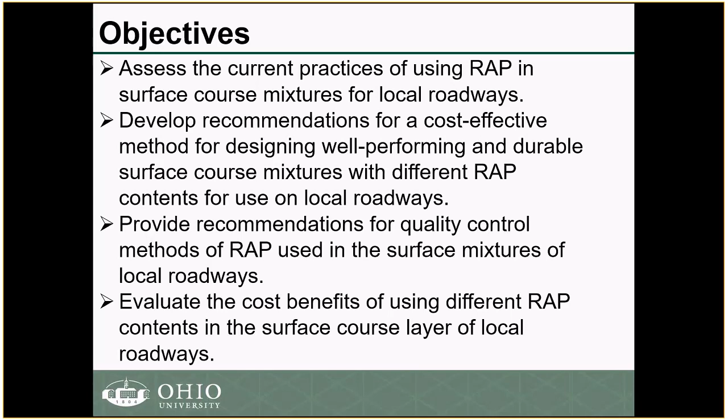And the last objective was to evaluate the cost benefits of increasing the percentage of RAP in new asphalt mixtures used on local public agencies, or LPA. So the study was divided into two phases. I'm showing here basically the tasks that we conducted in phase 1 and in phase 2.

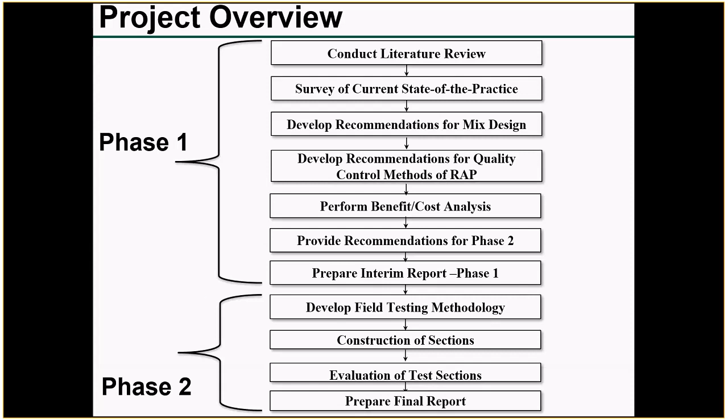So just focusing a little bit on phase 1. Again, phase 1 and phase 2 each were about 1 year long.

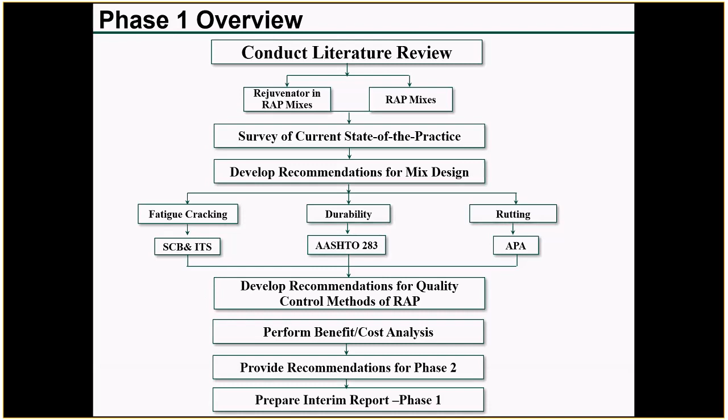The first task was conducting a literature review and a survey of local public agencies in Ohio to identify the current state of practice for using RAP in surface course mixtures on local roads. We also had a task to develop a mix design for mixtures with different RAP percentages, and develop a recommendation for QC/QA for those RAP mixes. This included performing cost analysis to determine the benefits and make recommendations for phase 2, and finally providing an interim report for phase 1.

So the survey was conducted in January of 2018, and it had a lot of interesting results, but I think the most interesting was this. Because of time, I will just limit it to one slide.

This slide is showing the percentage of RAP being used on local roads, according to the survey response, which was conducted about 2 years ago.

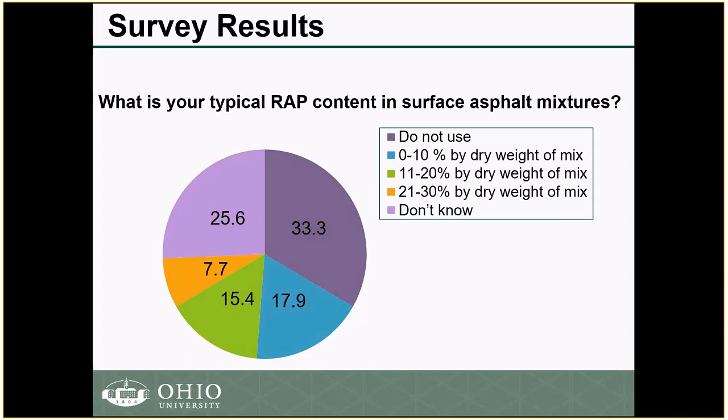The first thing we see is that about 1/3 of local public agencies currently do not, or at that time at least, did not use any RAP in their mix. Then about 25% didn't really know how much RAP was being used. What we've also seen is that the maximum was about 25%; some was a little higher, but mostly it was 25%. But again, less than 7-8% are actually using that amount in the surface course on their local roads.

So therefore, the next step was to conduct a comprehensive laboratory testing program, and based on that, we wanted to develop a new mix design approach.

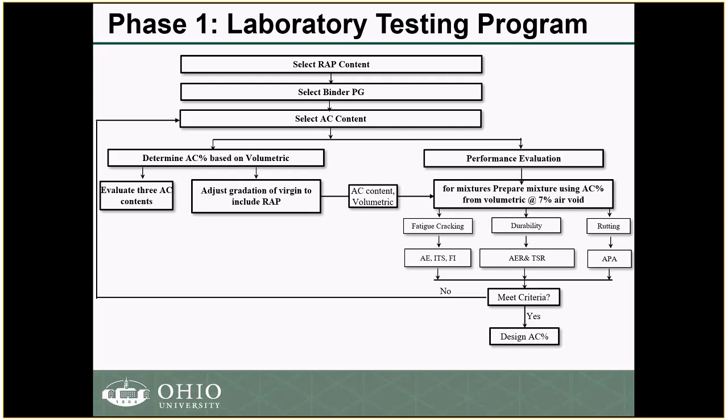The laboratory testing program was to design asphalt mixtures with different RAP percentages, which I'll present in a moment, the same way it's typically used by local public agencies, using the Marshall design method to determine the asphalt content. We then did a comprehensive evaluation of performance for durability, cracking, as well as rutting.

We looked into different mix designs and selected one that we've seen is typically used for a surface course on different local roads. What we also did was use 2 different RAP materials.

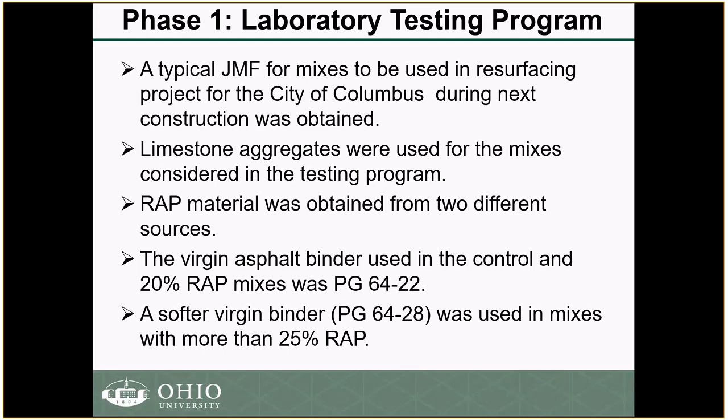We used a virgin asphalt binder in the control mix, as well as 20% RAP, which is PG64-22. The virgin asphalt binder used for mixes with more than 25% RAP was a softer binder, PG64-28, and this was based on testing of the binder.

We obtained RAP from different contractors and selected 2 RAP materials. What we tried to do is select RAP materials whose binders have different rheological properties. You can see a summary of those properties there, basically the continuous high temperature grade and the continuous low temperature grade, and there is a significant difference.

Most of our work was with the first one, which was obtained from Shelly Company in 2017 - Shelly 2017 Pile A. That's the designation for their RAP pile.

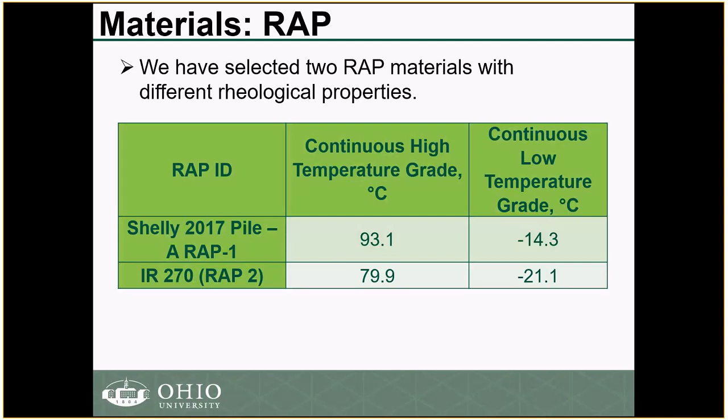Based on the literature, we found that a lot of researchers suggested that when you're going beyond 30% RAP, you might need to use a recycling agent.

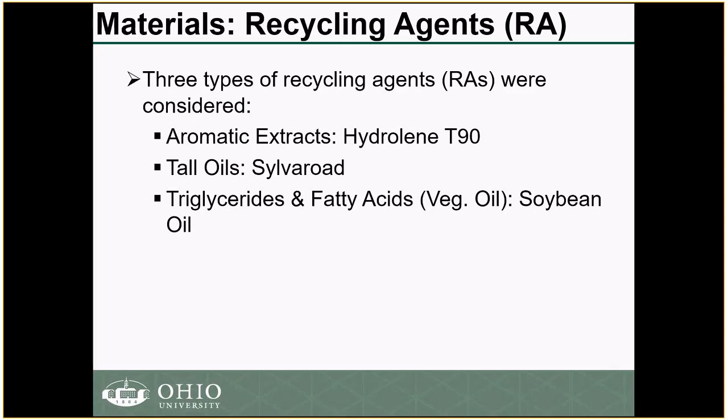Based on that literature review, we identified 3 different types: aromatic extracts, an example being Hydrolene T90, though other aromatic extracts are available; tall oil, where we used Sylvaroad; and triglyceride and fatty acid, where we used vegetable oil, specifically generic soybean oil that's available in the market.

So for the recycling agent, to determine the optimum dosage, we did binder testing.

We blended the RAP with the virgin asphalt binder in the same proportions as in the mixture, using different dosages of the recycling agent. Based on that, we determined the optimum dosage that results in a continuous performance grade for the RAP-virgin asphalt binder blend that meets the target virgin asphalt binder continuous grade, which in this case was 67.7 minus 22.2.

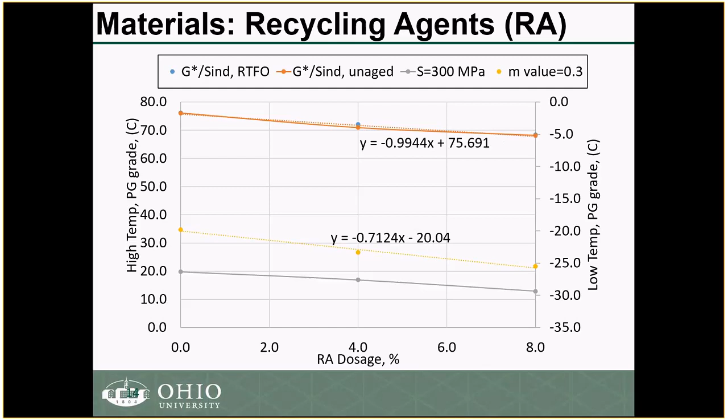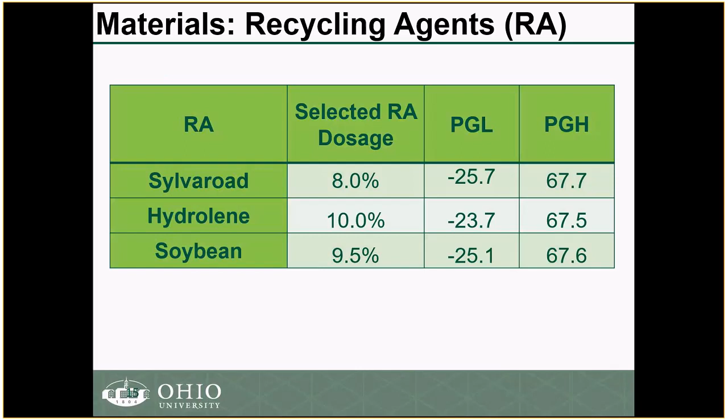This graph shows some of the results we obtained. We had the binder blend tested at different dosages of the recycling agent, and based on that we determined the optimum dosage. This shows the results for the different recycling agents, and you can see that the optimum dosage really varied depending on the type of recycling agent being used.

We tested 17 mixtures. I'm showing in this table all the mixtures we have. We started with the control, a purely virgin asphalt mix, and then we went to 20, 30, 40, and 50% RAP. For the 30, 40, and 50% RAP, just to remind you, we used a softer binder. For the control and the 20%, we used the 64 minus 22.

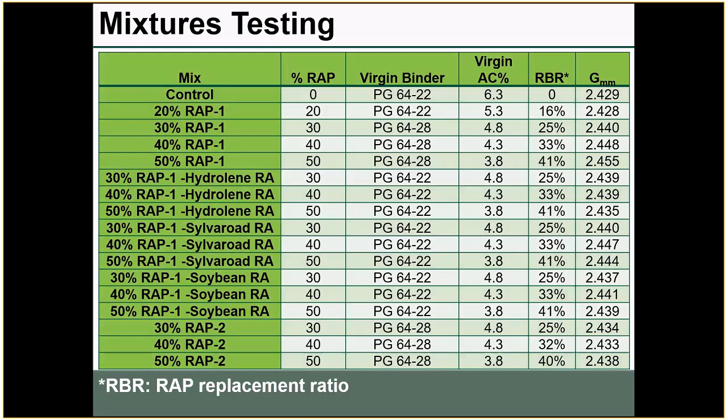For the 30, 40, 50%, we used the different types of rejuvenators or recycling agents. We also tested RAP2, the same mixtures but with RAP2, and that's what you see here.

We did different testing on the designed mixtures: for low temperature cracking, the ACCD or asphalt concrete cracking device; for fatigue cracking, SCB using the Illinois method, commonly referred to as IFIT; then the indirect tensile strength, and the modified AASHTO 283 for durability.

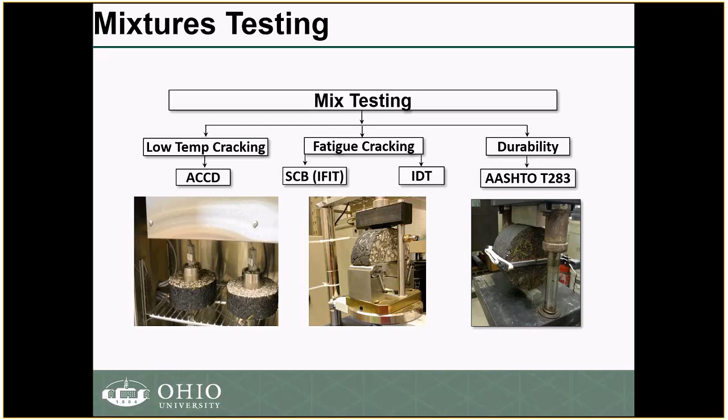Starting with the phase 1 results. For the SCB parameters, we looked into two parameters. The first, commonly used, is the flexibility index. This depends on the area under the load displacement curve, as well as the slope of the post-peak curve, shown here.

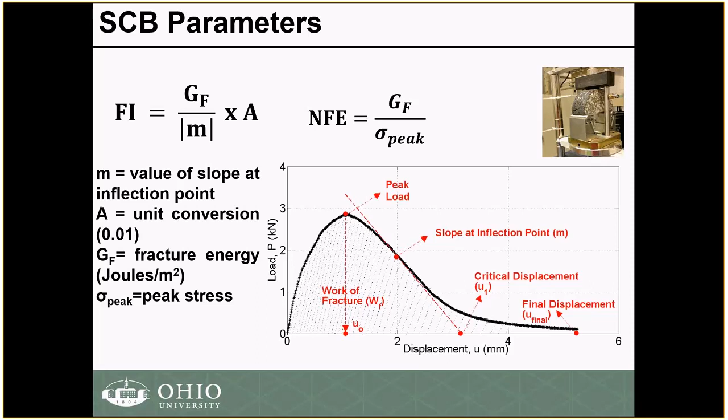Another parameter we recommended, based on a study conducted back in 2017 for IDOT, was the normalized fracture energy. It's basically the fracture energy divided by the peak stress, or the strength obtained in the SCB test. So I'm showing here the flexibility index.

A very important thing to note is that these numbers are for long-term aging, and the aging we did was through putting the prepared mixtures for 5 days at 85 degrees Celsius. What we can see is that as you increase the RAP percentage, the flexibility index is lower, indicating it is more prone to fatigue cracking.

We can also see that although we used a softer binder in the 30%, 40%, 50% RAP mixtures, this did not really help in improving the fatigue cracking resistance of those mixtures.

What I'm showing here is the results for the 30, 40, 50% mixtures with the recycling agents - the 3 recycling agents. We can see that the recycling agents were able to improve the fatigue cracking resistance of these mixtures, in general resulting in fatigue cracking similar to that of the 20% and the control.

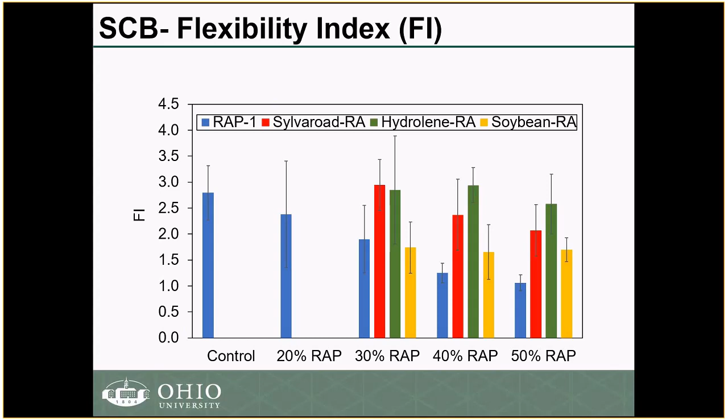Very important, before I go to the next slide: the variability of the flexibility index was relatively high, between 20 and 25%, which we also noted in the previous study. That's why we used the normalized fracture energy, for which the coefficient of variation was less than 15%. It shows a very similar trend to the flexibility index, which we also noticed in our previous study.

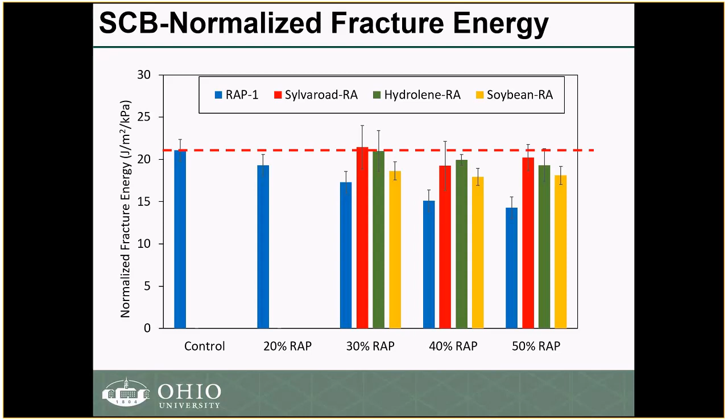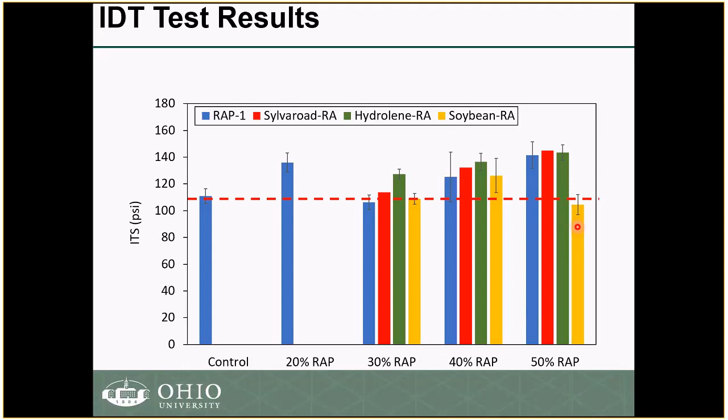One of the things we have noticed is that, in general, the different recycling agents did not really decrease the ITS, except as you can see here, there was a little bit of a decrease with the soybean-based agent, and this is indicating a softening effect of that recycling agent.

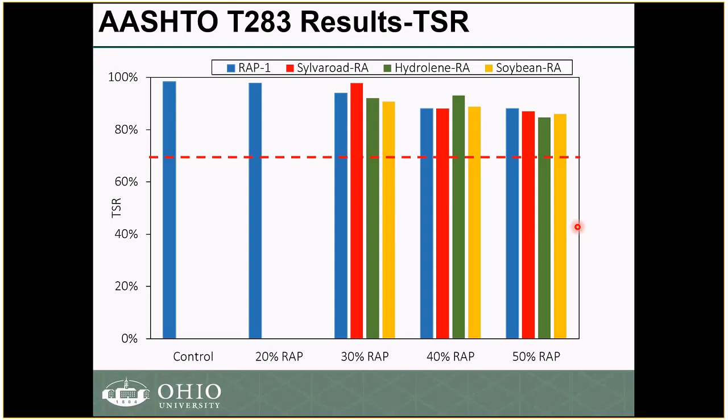In terms of durability or moisture damage resistance, as measured by the TSR, the tensile strength ratio, typically it's required to be between 70 and 80 depending on the mix type. As you can see, it met both the 70 and 80 criteria - all of those were above 80%. In general, using RAP will not result in any moisture damage if your mixture is well designed, meaning you have a good amount of asphalt binder. The TSR for all mixtures were beyond 80, so it met the criteria.

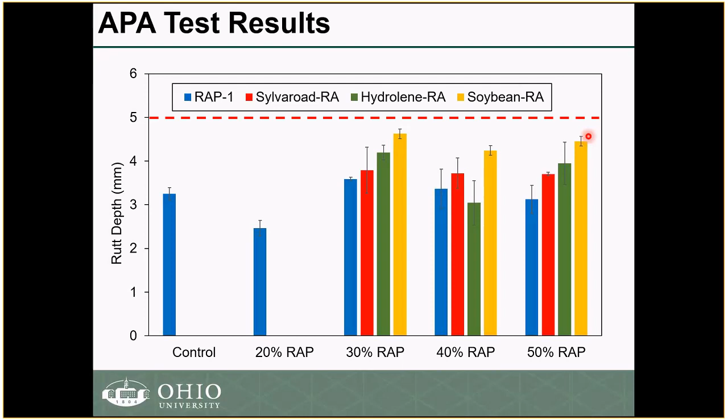We also did the asphalt pavement analyzer to evaluate rutting, because we have seen that there might be some softening. Again, all mixtures have met the criteria, which is 5 millimeters for mixtures with medium traffic. The only thing I'd like to note is that using a softer binder increased the rutting, but it's not that significant - in all mixtures it was not really high. The recycling agent, to a certain degree, some of them resulted in higher rutting, specifically the soybean-based one you see here, which again indicates the softening effect of that recycling agent. But in general, all of those mixtures in terms of rutting met the criteria of less than 5 millimeters.

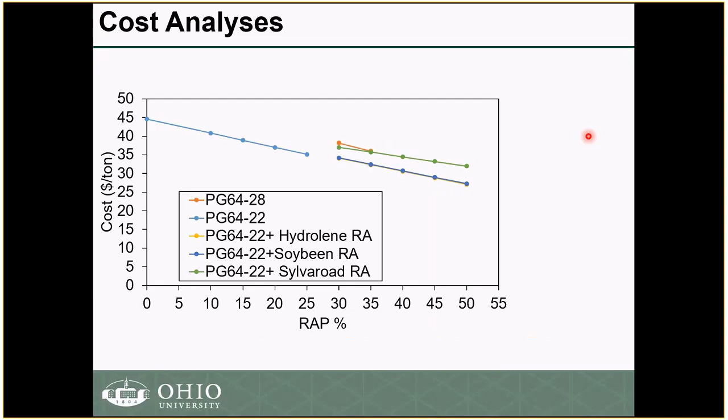So we did a cost analysis, and in phase one, the cost analysis was based on prices back in 2018. It's very important to note that the binder cost and even the rejuvenator or recycling agent cost have changed since then. So these results are based on the cost and prices at that time, beginning of 2018. What we have, as you can see, is that increasing the RAP binder or RAP content results in a decrease in the cost, and basically an increase in the cost savings.

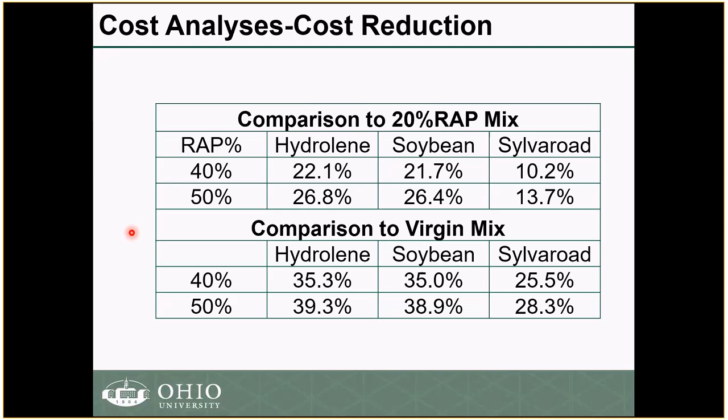If we're comparing it to the virgin mix, and this is important because, as I said at the beginning, some local public agencies are not using any RAP. It's about 1/3 that are not using any RAP in their mixes. So therefore, that comparison, at the second part of this table, is very important for those agencies. You can really go up to close to 40% when you're using a 50% RAP.

So the effect of the RAP source, and that was very important, is that whatever results you're getting for one RAP, you cannot really extrapolate it to another RAP. That is very important for this study and for the local public agencies who would like to implement the studies, that you need to look at the RAP.

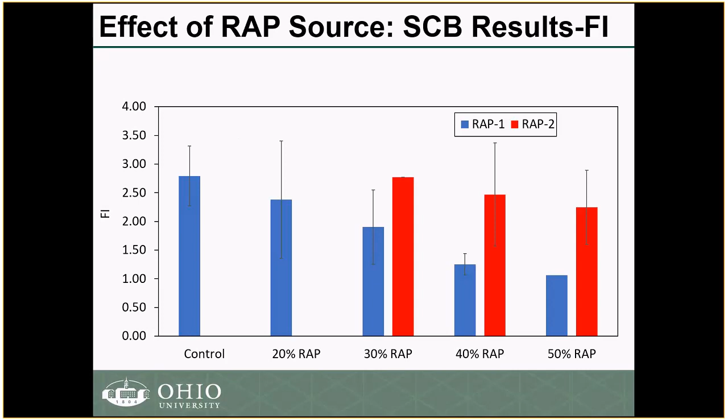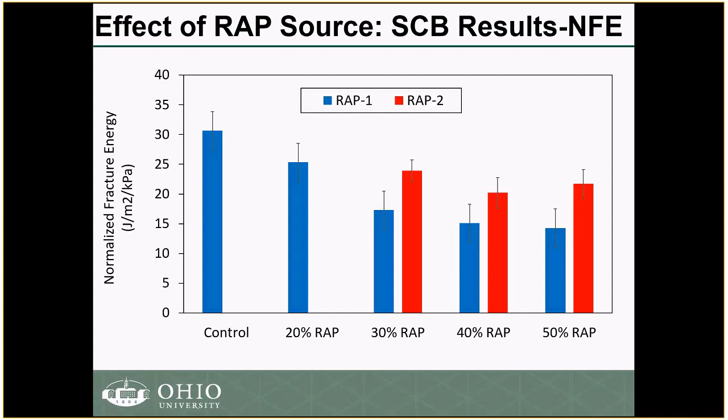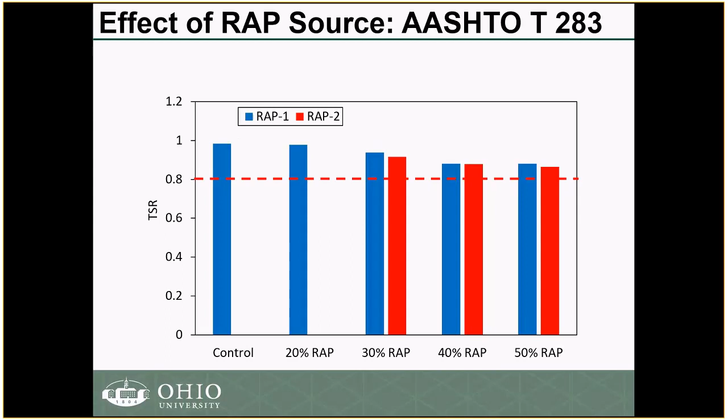For the thermal cracking, there was a difference, and you can see it here, but it was not as significant as the one that we have seen with the fatigue cracking.

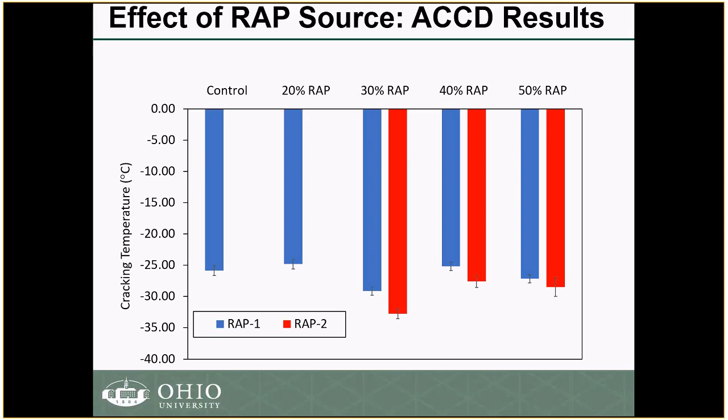So the findings from phase 1 are that using a softer binder did not really result in being able to overcome the effect of the RAP when we're using more than 30% RAP, and therefore we had to use a recycling agent, the aromatic oil, and basically the tall oil that we have used.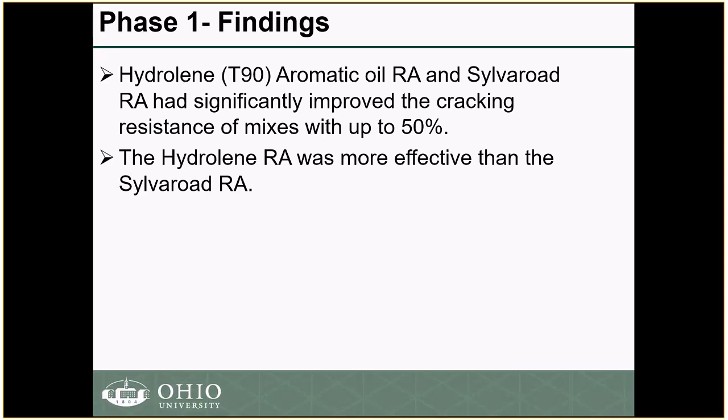Recycling agents have resulted in mixtures with 30, 40, and 50% RAP that have a similar fatigue cracking resistance to that of the control and the 20% RAP mixes. We have seen that the aromatic oil and the Hydrolene had a better improvement and were more effective, specifically when we went beyond 40% RAP, as compared to the Sylvaroad.

The soybean basically resulted in an improvement. It was comparable to the 64 minus 28 at the 30% RAP, but we can see that its improvement was not as significant as those for the other two recycling agents. So what we have noticed is that the soybean is really resulting in a softening effect, and therefore it did not improve significantly the fatigue cracking resistance of RAP mixtures when using more than 30% RAP percentage.

In terms of cost analysis, if we are comparing to the 20% RAP, or the one that is currently used, using Hydrolene and 50% RAP can result in about more than 26% reduction, as compared to the Sylvaroad, which will result in this case in 13%. The RAP source has a significant effect on the performance of the asphalt mixtures.

So basically, no two RAPs should be treated the same, and therefore it is very important for those agencies that are planning to implement the results of this study. It is really important that the RAP binder should be characterized in order for you to use a RAP percentage more than 30%.

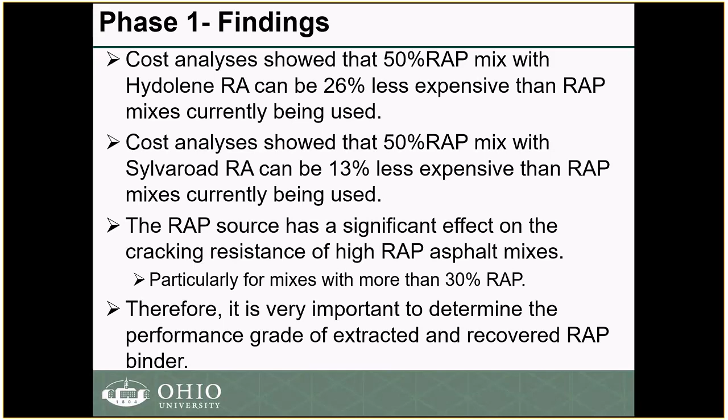So it is really important to quantify and characterize the properties of the RAP binder. This is the recommended mix design, and again, in our mix design, rather than using the RAP percentage, we are using the RBR.

This is something important, because when we went to the field, we found out that your 40% RAP can result in a different binder replacement ratio. And at the end of the day, the most important factor is how much of your binder in your mixture is being replaced by the RAP binder. This is more important than the RAP percent itself.

We're using the RBR, which is the RAP binder replacement. If it is more than 0.25, or less than 0.25, then basically you need to use a binder grade that meets your target binder grade. You should be using this equation to determine that.

If it's higher, then you need to use a recycling agent. Based on our results, the aromatic oil and the tall oil are the ones we tested, and basically they performed well. But this mix design allows you to use any recycling agent as long as you meet the criteria. We tested 2 types, but this doesn't mean those are the only types that can be used.

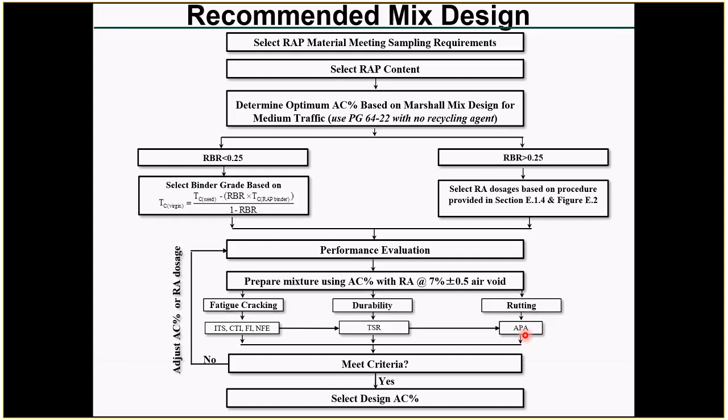So if it meets the criteria, then whatever design you had in the volumetric based on the Marshall method can be used. If it does not, then you need to change either your recycling agent dosage or your asphalt binder. The contractor has to work this out so they will be able to meet the criteria.

And this is the criteria based on our testing. A very important thing I'm showing here is that the SCB test results are based on long-term aged samples. We did it according to AASHTO R30. There are new test methods, and if needed, there should be a validation of those methods comparing it to the ones we have. We have a TSR of 0.8, and the rutting should be a maximum of 5 millimeters.

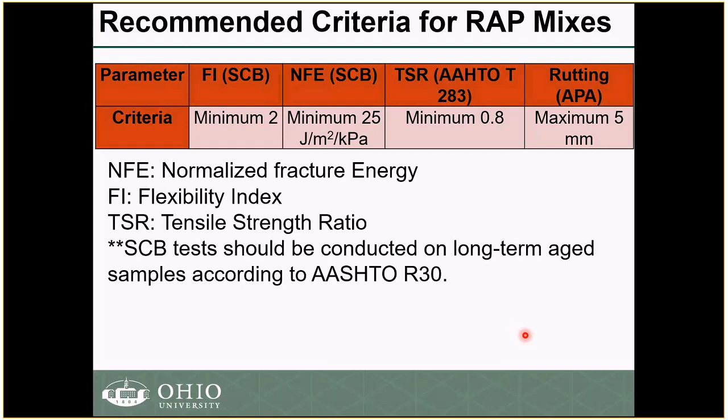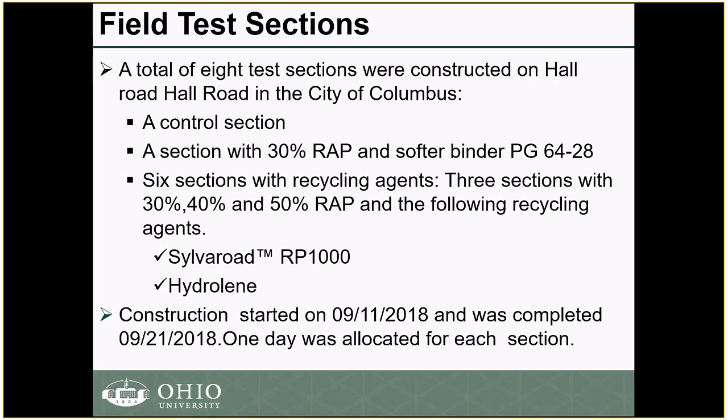So phase 2 mainly was to construct test sections. We did 8 test sections. Those test sections were on Hall Road in the city of Columbus. The construction was done in September, between September 11th and September 21st. Every test section, the 8 test sections, we had 1 day for every test section.

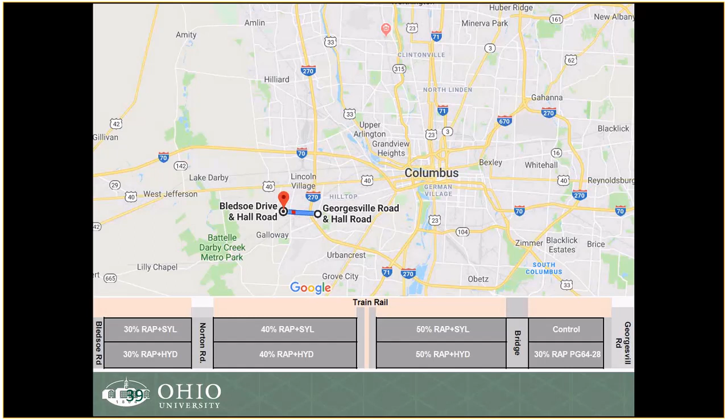The entire project was about 2 miles in length. It extended between Georgesville Road and Bledsoe Drive, in the west end, southwest of Columbus. That roadway was a two-lane roadway, and we tried to have those sections split equally within those 2 miles. The layout of those sections is shown in the graph here.

So first we did some preliminary testing, mainly the light falling weight deflectometer. This was done to determine where the cores should be taken, so we could avoid areas showing significant deterioration that are distressed. So we would not take cores from there.

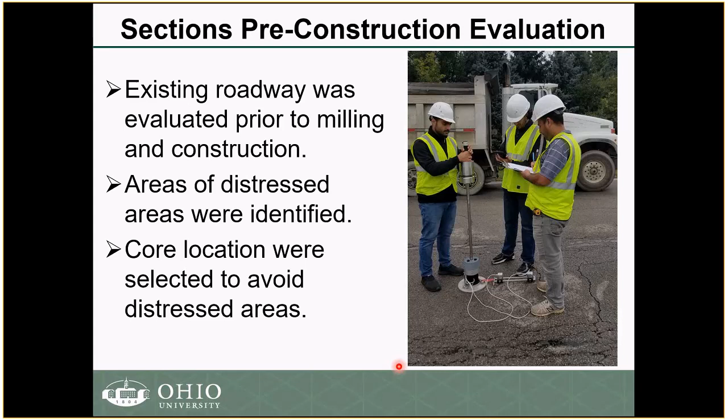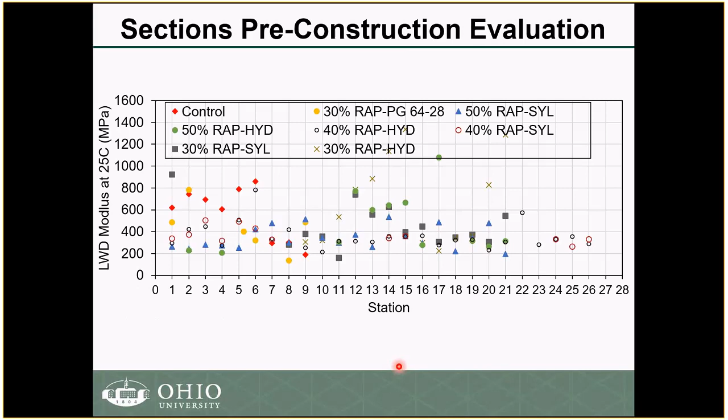So during construction, we monitored the placement, mainly monitored the temperature. We obtained density as well, and we obtained core samples. We also made sure there were no problems during construction, and if there was a problem, we had to notify the City of Columbus inspector. In general, there were no problems during construction.

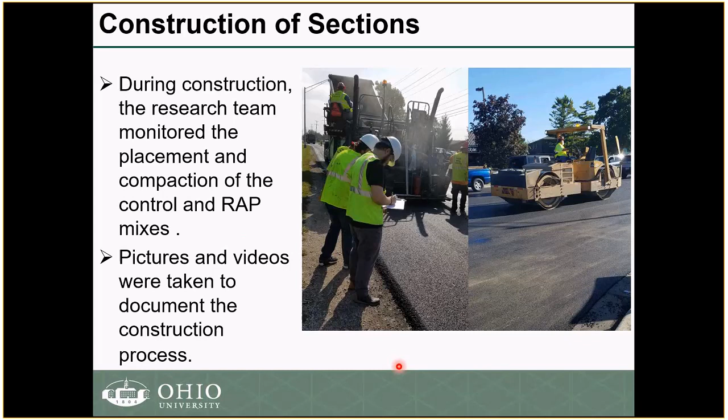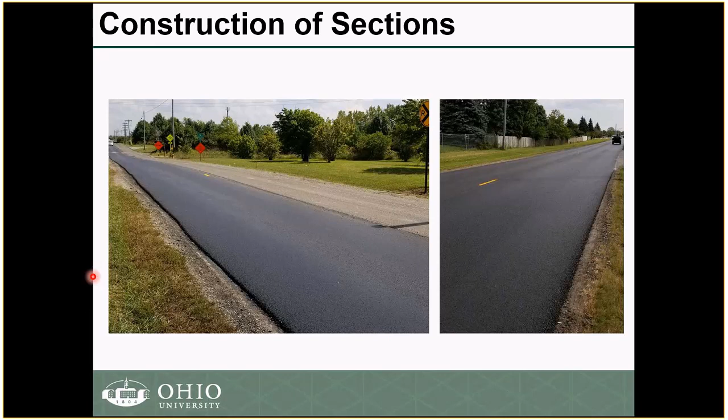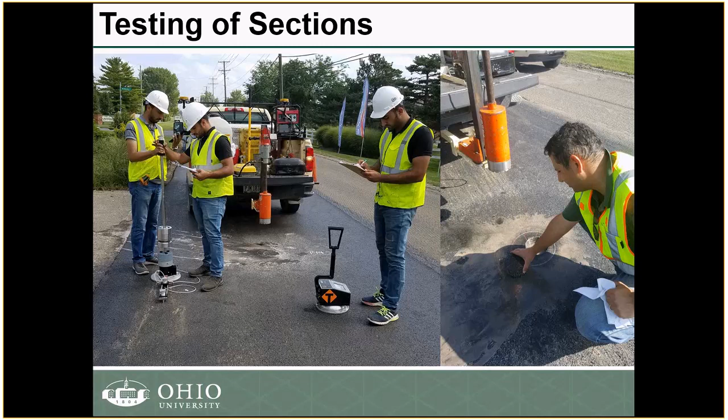Again, pictures here during coring, and basically also what we have done. We did some testing, density testing, as well as light falling weight deflectometer testing after the construction, and also we obtained at least 10 cores from each test section.

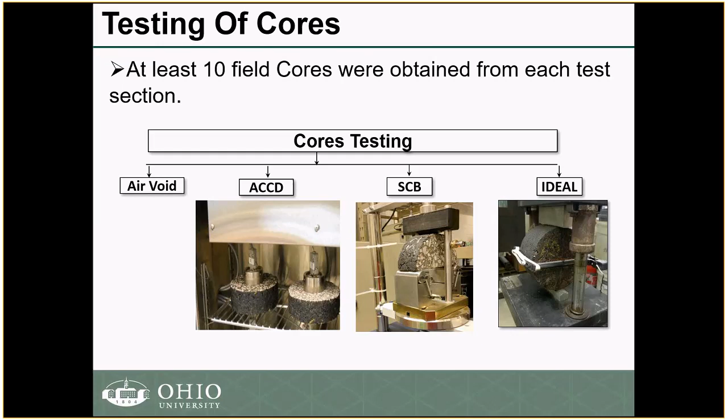We did testing on core samples as well as on samples that were prepared using the field mix that were compacted in the lab. The first thing was to do the air void, and then basically doing the ACCD for low temperature, SCB, and then we did IDEAL. Again, at that time, the construction was in 2018, so that test had no AASHTO procedure we could follow. Basically, those are the different tests that we have conducted.

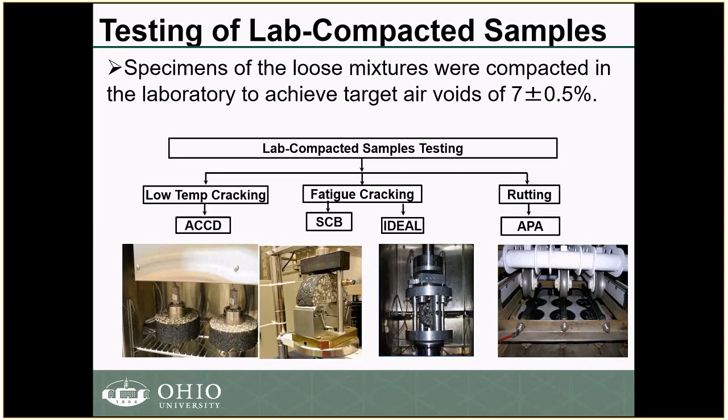For the lab sample, we did the same exact test, but we also did the asphalt pavement analyzer, because with those mixtures, we can compact different mixtures with the different sizes needed for the APA.

Starting with the RAP, a very important thing is that the RAP used in this project was a little bit rich in terms of the asphalt binder. It had about 6.1, which is, I would say, higher than what is typically used. Typically it's about 5 to 5.25, which is the typical RAP content observed in the field. But this one was towards the higher end. I think that RAP was obtained from a job for Franklin County.

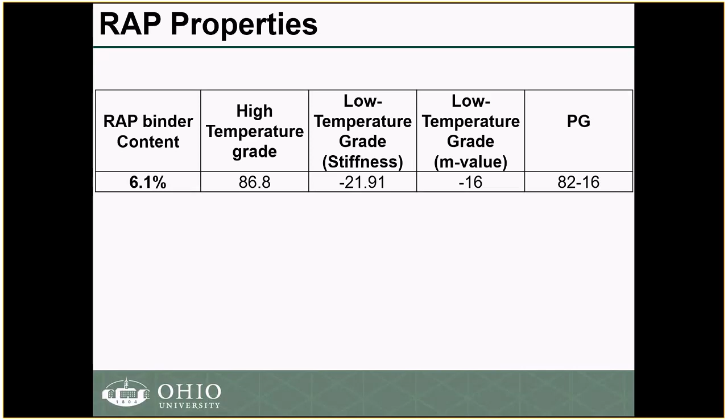The high temperature grade was high, it was 86.8, and then basically your low temperature, it was minus 16.

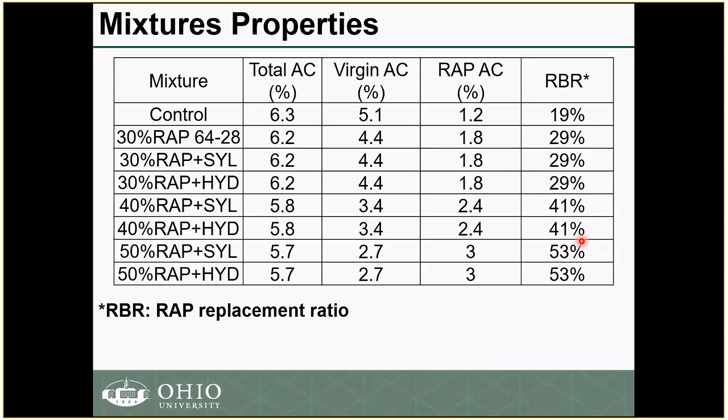Very important thing is that those are the different mixtures that were used in the field. The RAP percentage, the RAP binder replacement was higher than what we have seen in the lab. So for example, your 40% RAP had the same RBR as those we have seen in the 50% in the lab. And then basically your 50% RAP had about 0.53 RAP replacement binder, which is much higher than the maximum RBR that we have seen in the lab. Again, that is when it comes to the field, you cannot really control those things.

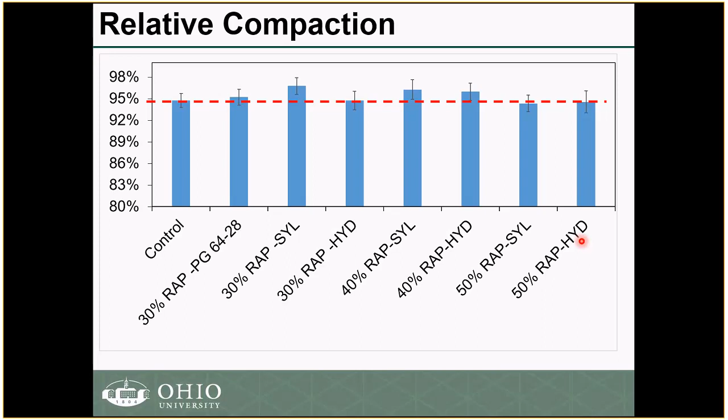Okay, so the results here are for the field cores. This is the flexibility index. Very important, those are core samples, so those core samples are short-term aged, I would say, if you want to compare it. And basically what you can see here is, in general, for 30% RAP, all mixes perform well, whether it is the softer binder or the recycling agent.

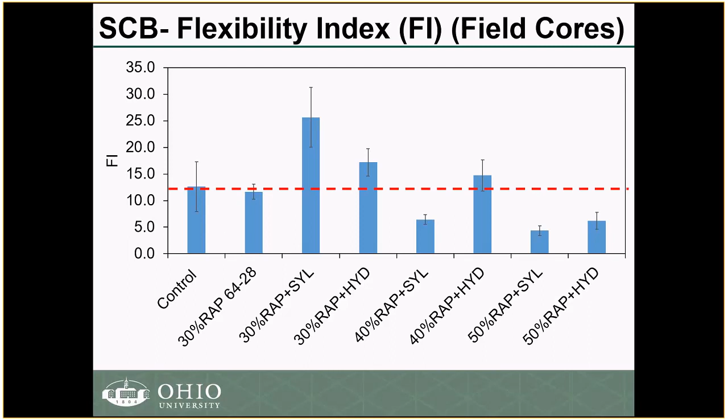But when we went to the 40%, the Hydrolene had similar results to the control, but the Sylvaroad did not really show the same improvement that we have seen with the Hydrolene. With the 50% RAP, and again this is where we have about 0.53 RBR, both did not really show an improvement. Basically, they were significantly lower, or had a significantly lower flexibility index as compared to the control mix.

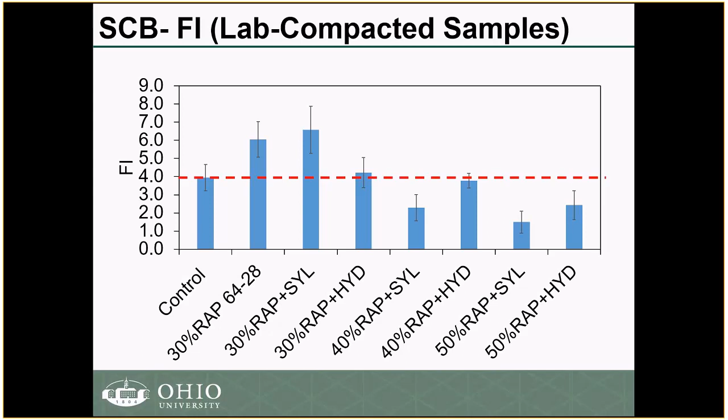If we are looking at the lab compacted, so those are field produced, lab compacted, we're seeing a similar trend as the cores, but the main difference is that your lab results had a lower value, so it's the same trend but lower. Again, that might be, as other studies have reported, attributed to different things. I would say the first thing is that the lab compaction will not be the same as the field compaction. And then, although we corrected for the thickness, there was still a difference in the thickness between the samples.

In terms of the normalized fracture energy, again, similar results that we have noticed.

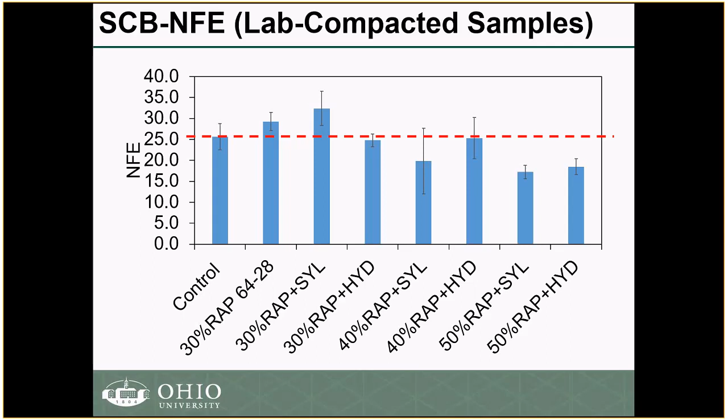One thing I want to mention is that the difference between the values from the lab compacted and the field cores was not as significant as with the flexibility index. Another test is the IDEAL test.

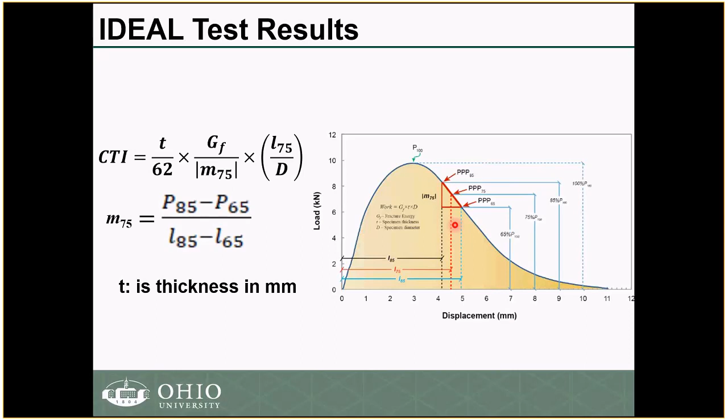The main parameter from here is what we refer to as the Cracking Tolerance Index, or CTI. This procedure was developed by Dr. Fujie Zhou from TTI as part of an NCHRP IDEA study, and it depends on the fracture energy and also the slope of the post-peak. This test is conducted the same way as an indirect tensile test, except you have to monitor loads and deformation and record them throughout the test.

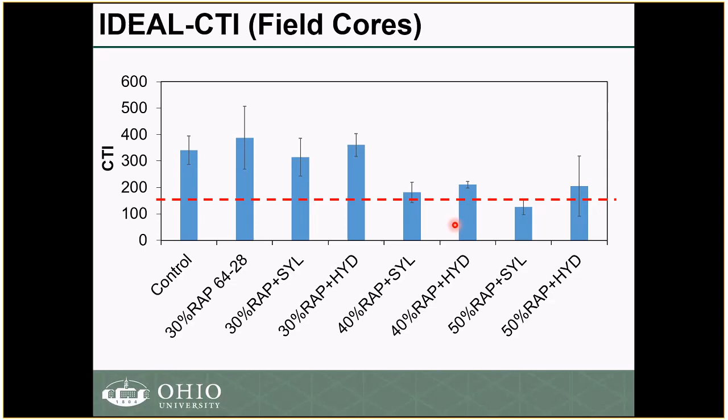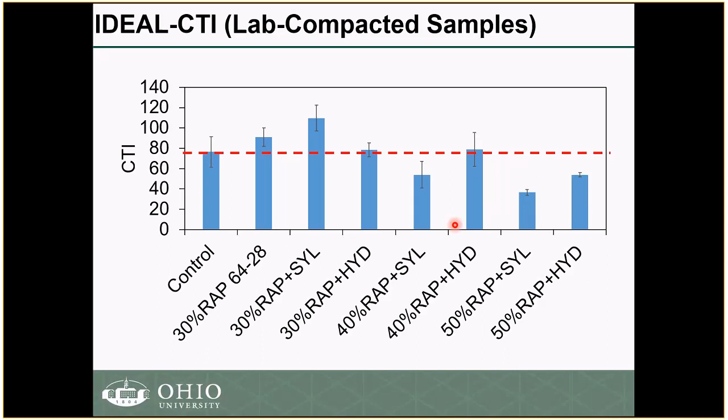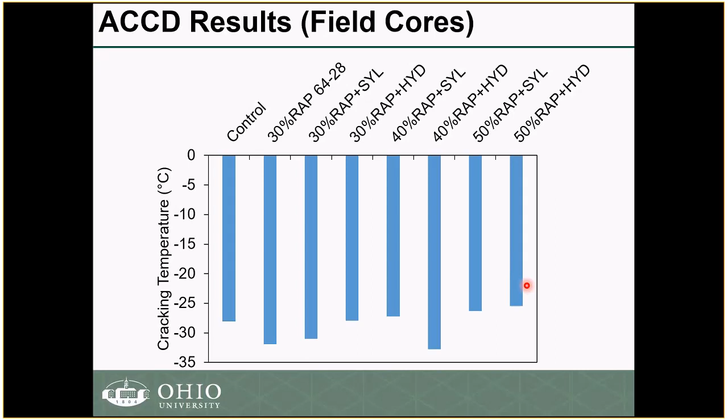In terms of the cracking temperature, according to the ACCD test results, all mixtures basically had similar performance. The cracking temperature was very similar, except maybe for the 50% mixtures, especially the Hydrogreen, which had slightly lower values, but it was not that significant.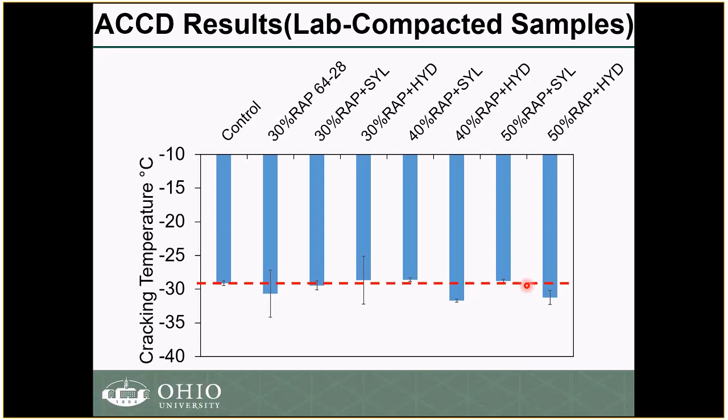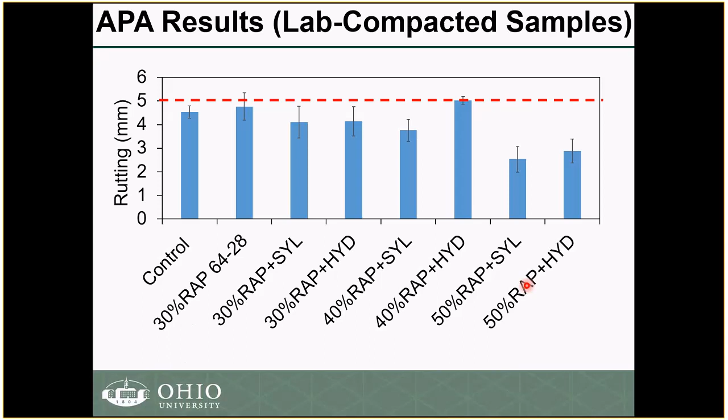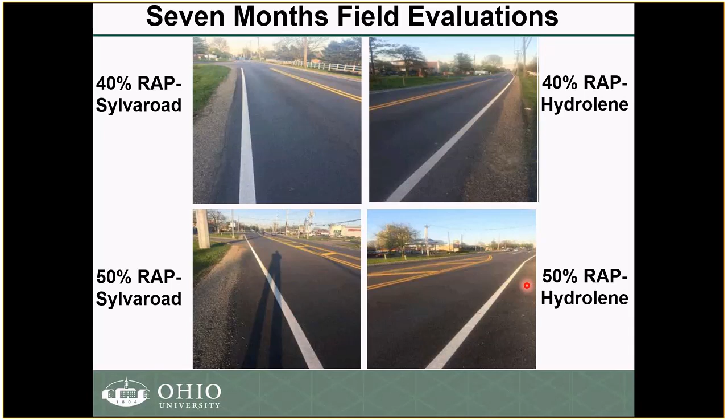So those are pictures that were taken last April. It was sunny and warm that day. Again, no problems based on the 7 months we've observed. All the sections have, I would say, no distresses and similar performance. But again, this is a very short period to do an evaluation.

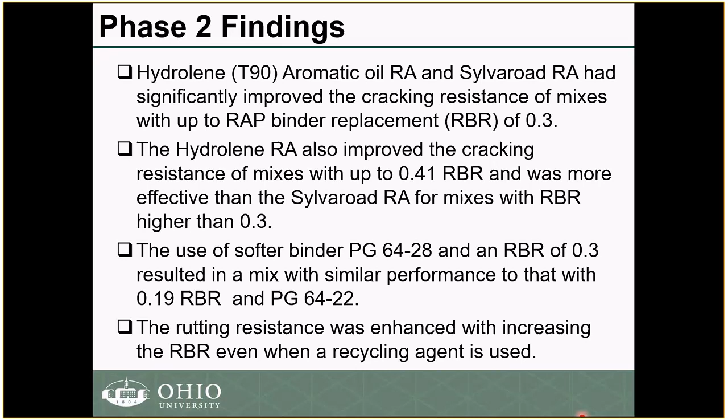The softer binder, with 0.3, resulted in a similar performance to that of the control mix with 0.19 RAP binder replacement. The rutting resistance was enhanced by increasing the RBR in general, even when recycling agent was used.

In general, the flexibility index, the normalized fracture energy, and the CTI had similar trends in the field and in the field cores and the lab compacted samples, but the values in the field cores were higher. And again, the cost analysis conducted in phase 2 shows that with 40% RAP, you can reduce the cost by at least 15%.

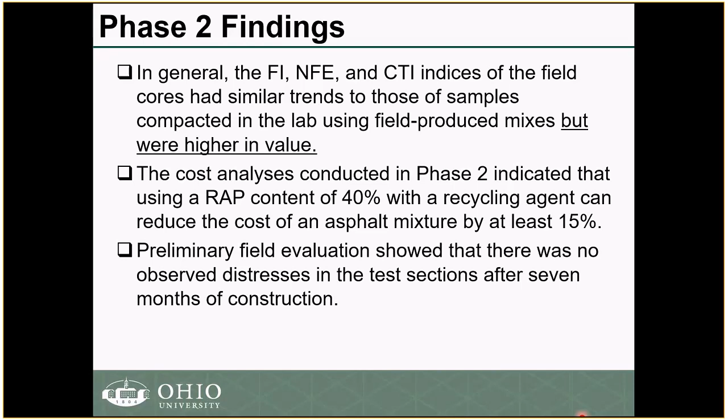A preliminary evaluation we have conducted so far indicates that the test sections show no real issues after 7 months of construction.

So what are we recommending? Again, we only monitored those test sections for 7 months. This is not enough to draw any conclusion. So what we're recommending is that those sections have to be monitored. We have provided in our report a methodology for monitoring those test sections. I would say that those test sections should be monitored for at least 5 years. And then, based on that, you can draw conclusions about performance and also about the cost effectiveness of increasing RAP.

Mix design specifications were developed, as well as QC/QA for mixtures with different RAP contents. I think if we want to evaluate the feasibility of using RAP, that mix design should be implemented, and we're recommending that different local public agencies start using those specifications and do pilot studies. Based on those pilot studies, I guess there will be much better data to really help in increasing the RAP percentage for local public agencies.

One important thing is that we have done limited work on the recycling agent's effect on mixture performance with different RAP percentages, but I think there should be further study about that. Our study was limited because of time, and therefore studying the effect of different recycling agents should be done in the future.

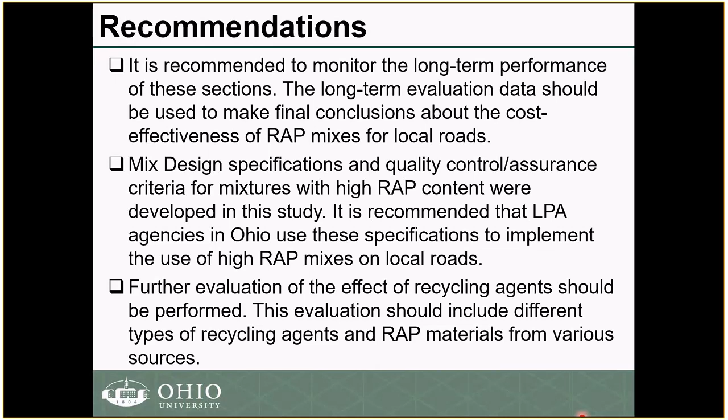With that, I would like to conclude everything, and hopefully our roads will always be smooth, just like this road.

We start with the... is your lab data long-term or short-term? All lab data for phase 1 are short-term. Are you talking about phase 2? Both. Phase 1, everything is long-term that I'm presenting here. Phase 2, it's short-term, because the core samples were short-term.

And the long-term aging was done using the AASHTO R30, so 5 days in the oven at 85 Celsius.

Munir, thanks for the great presentation, first off. You mentioned about the bio-based rejuvenator, the soybean, as being more towards a softening. The information seems to indicate it's more of softening, and you identified that based on the long-term aging.

With respect to the other two that were used, by virtue of the fact that they maintained their ability to provide resistance against heat cracking and those other properties, does that speak to the longevity of their effect on pavement? Yes, that's a good question.

So the problem with having, I did not present here, but I think it is in the report, the results of the short-term aged, or results on short-term age sample, actually the soybean, you can see it had, to a certain degree, similar results to that of the other recycling agents. But once you go to the long-term, you can see there is a drop.

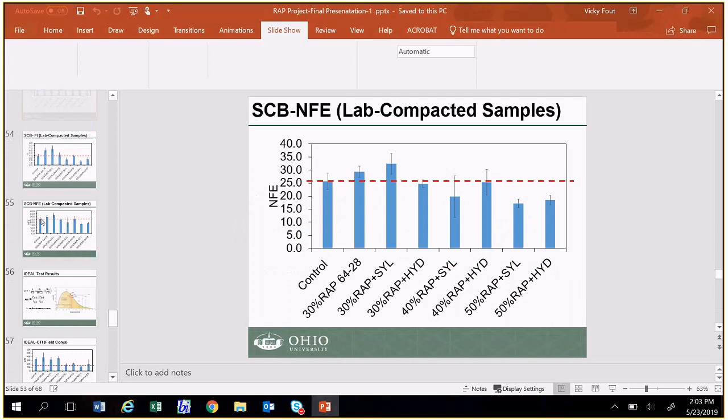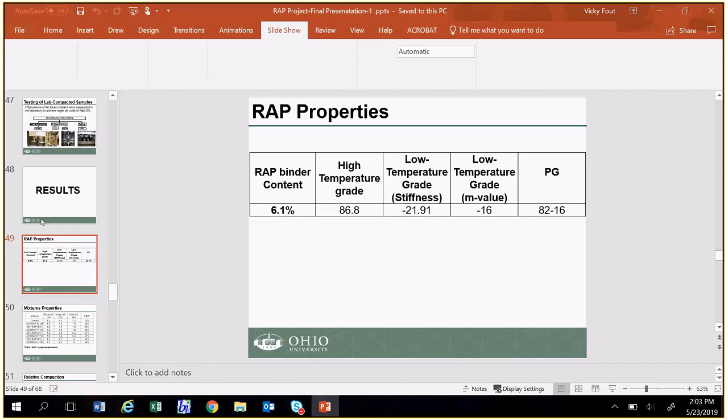I don't have the screen. It's, again, for... if you go to... yeah, I have the slide here. But again, this is for the long term. It's like right before phase 2 starts.

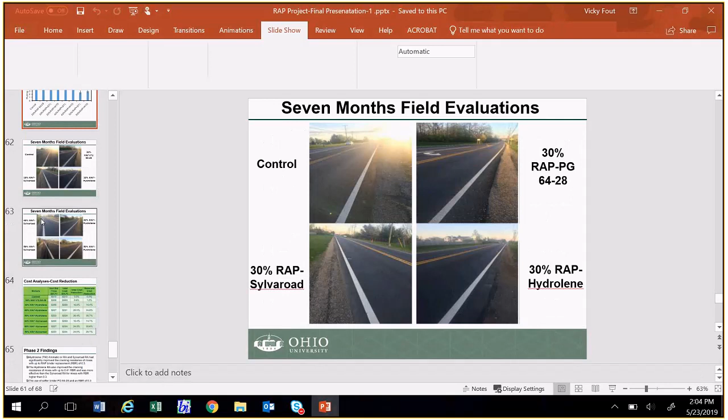The question is always, they met the minimum, but if something is meeting the minimum, is it higher than the minimum? I think the field should tell us more about that. But again, we did not really include any performance in any of those, and that's why we recommended that any recommendation about cost effectiveness should be based on the long-term monitoring.

So that slide, is it design acceptance or design in? This is basically for the design. Specifically, are you referring to when you talk about performance, are we talking about years here, or are we talking about testing performance, like the actual physical data?

The recommendation is based on, because in the mix design we would like to do a long-term aged test. For quality control it's different, but for quality control we did not really recommend SCB, we recommended just the ITS, and basically this is just to make sure the mixture is holding up. But for the mix design, we recommended using the SCB, and basically the SCB was based on the long-term age.

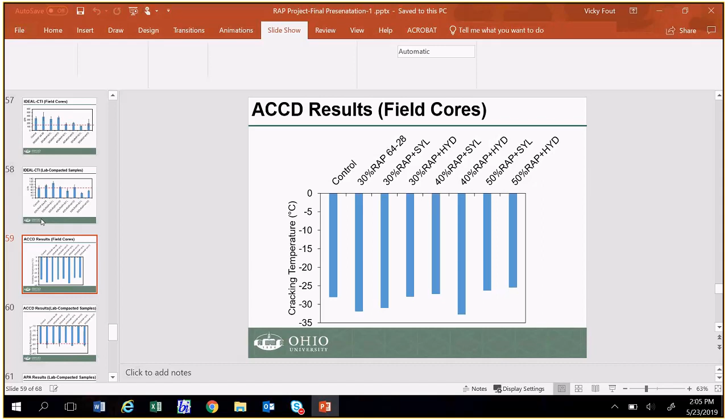So I guess, in theory, there should be a little asterisk by your cost analysis, since those are just based on unit bid prices. We should include that this is initial cost. In the recommendation and everything, the presentation might not state it, but this is based on unit bid price.